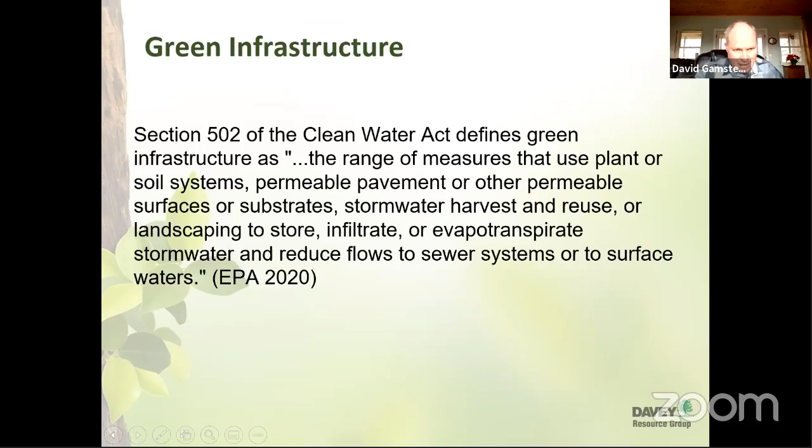That's a lot to say. That is a big mouthful. But now I'm going to double down on it. This is kind of the nuts and bolts of it, and why we think this is a very viable solution for many of our communities.

It's a cost-effective, resilient approach to managing wet weather impacts that provides many community benefits. While single-purpose gray stormwater infrastructure is designed to move urban stormwater away from the built environment, green infrastructure reduces and treats stormwater at its source while delivering environmental, social, and economic benefits.

So what we're talking about is restoring the natural systems that take place around us, where we don't have very highly complex, paved, developed communities.

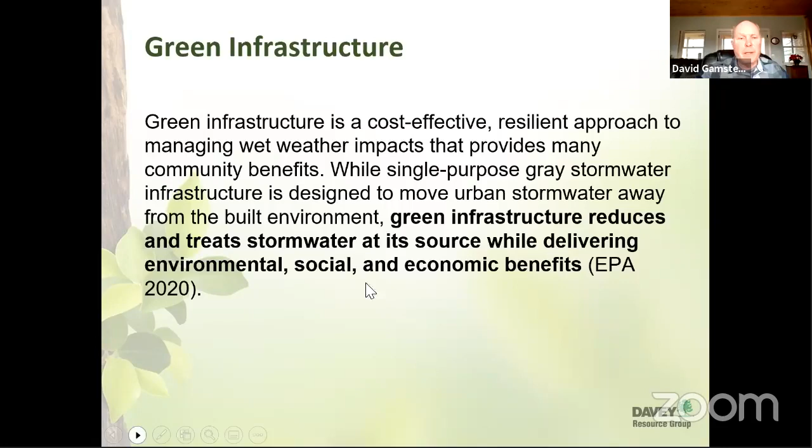And so what I thought was interesting from the two cities that I've worked on - well, actually we also did some work with Addis Ababa, Ethiopia, which is a totally different animal, different issues, different problems - but Malmo and Cincinnati were both kind of similar in how they're addressing some of these concerns and problems with stormwater.

And both communities are using their parks and open spaces for managing stormwater and integrating it for exponential benefits. So parks can serve their primary goals to offer both passive and active recreation, while also containing spaces that mitigate stormwater. Green infrastructure can achieve essential utility functions in the community while creating environments that provide nearby nature experiences and support human health.

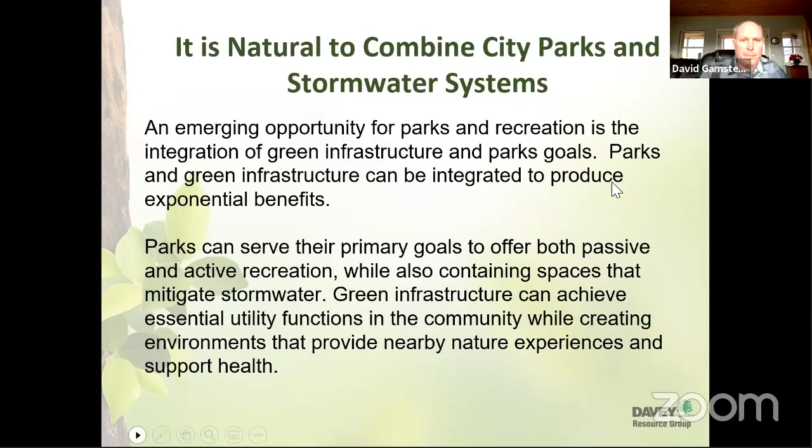Parks and clean water are both important public commodities, and combining the two offers great opportunities for collaboration. In the simplest form, water management requires space, and parkland is a leading resource of space in cities. Conversely, park maintenance requires money, which most communities have to balance budgets with police and fire departments, and parks are always scrapping for every dollar they can get.

And water utilities, such as sewer or stormwater departments, usually have a steady, predictable source of revenue. So we need to think about how we're going to integrate these systems in our parks through careful planning and community engagement. But there are great rewards if it's done properly, and today I'm going to show you some projects that I think are very rewarding.

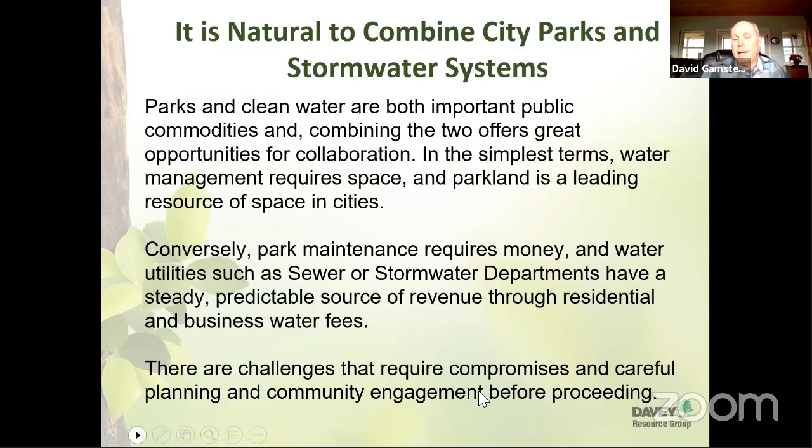So I wanted to look at, really, do we really have the opportunity in our high density, highly developed communities and cities, do we really have room to do this kind of work? So I looked at the Trust for Public Land statistics. This is from '19, I don't think it's changed much as of now.

But look at New York City. We think of New York City as a very, very highly developed community, but they have almost 22% of their area as parkland, 40,000 total park acres - big numbers. DC, we're looking at 21.1%. There's probably not as many opportunities in DC for green infrastructure integration, but San Francisco, we're looking at almost 20%. Jersey City, Boston, Minneapolis - these are all cities that are considered to be pretty well developed, but they all have a substantial percentage of land area devoted to parkland.

So the first one I want to start with is Malmo. Malmo is a coastal city, just above sea level, and there's a lot of concern about climate change and rising sea levels in Malmo. They also get quite a bit of rainfall, and it's very flat, so they have problems with stormwater and getting it out of some parts of the city. They see it as a value to reuse it as much as possible and to integrate it. They don't have combined sewer systems like we have in Cincinnati, but they still have flooding issues.

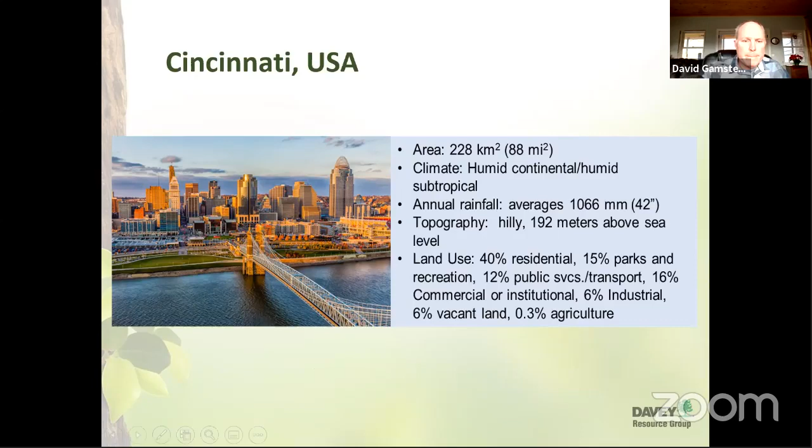And then Cincinnati, my hometown, both cities are similar size. Cincinnati has more rainfall, 42 inches. The topography is very hilly. It's very different, but the land use is kind of the same. And the primary issue in Cincinnati is combined sewer overflows.

So they wanted to look at how they could manage that water upstream, and the first place they looked was this park. Part of the solution was to excavate some of the soil out of this. Even though it is a slope, we still have drainage out, but they could detain parts of it by creating these small basins in lawn areas. They're still used as lawn areas, still used for passive recreation - when I was there, people were throwing Frisbees and hanging out in these areas. It gets wet sometimes in the bottom of the basins, but it's still used for passive recreation. They did their best to locate these away from existing groves of trees.

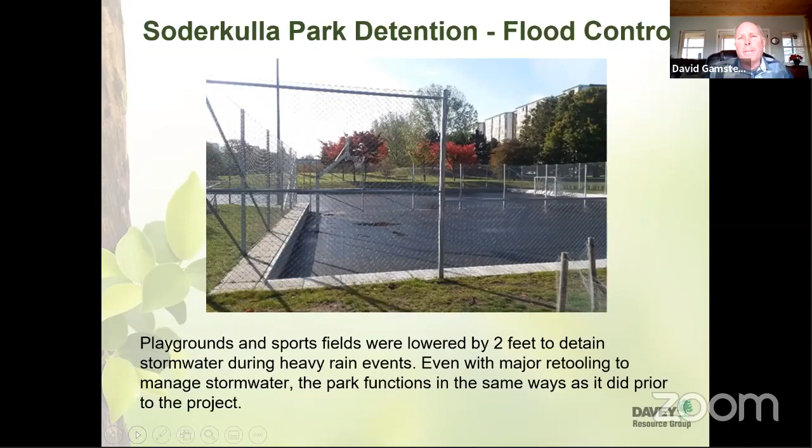I think Germany is number one in green roofs, and I think Sweden is number two, to develop green roofs because of the environmental benefits that they get. The roofs are transpiring water, they're filtering it through the media and the plants, they're slowing down peak flow. There's a lot of benefits to it, as well as preserving the length of time that the roof is functional - you get more years out of it if you put on a green roof, plus energy conservation.

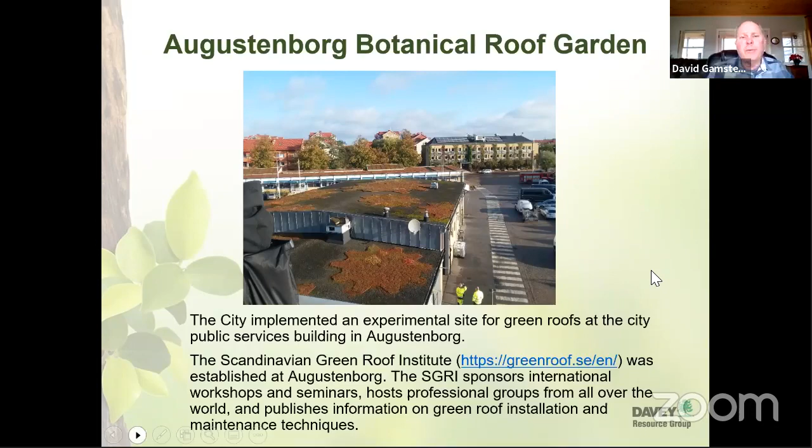So they partnered with the Scandinavian Green Roof Institute. They gave them some space in their building and set up a big demonstration experimental garden. The scope of this is just huge - we got to go up there and walk around and look at it. They bring people here from throughout Europe and the United States to do training, and universities sponsor different experiments. They do different types of planting - they're looking at different plant ecotypes and how well they manage stormwater and how well they grow on green roofs. Here we have a couple different types that we use.

We have intensive and extensive systems, but they're kind of based on where we live, we use certain plants. In Malmo, they're looking at what else can be done. How can we do something that's going to be usable in the northern parts of Scandinavia as well as the southern part? Malmo is the southernmost part of Sweden. How can this technology be transferred and used, and how can we experiment and figure out what works best?

So they do water testing for the water that comes off of the roof. It was a really interesting use of public space that isn't impaired by the installation of the stormwater management controls. They have partners to help manage it, and it was just a really cool place to go visit.

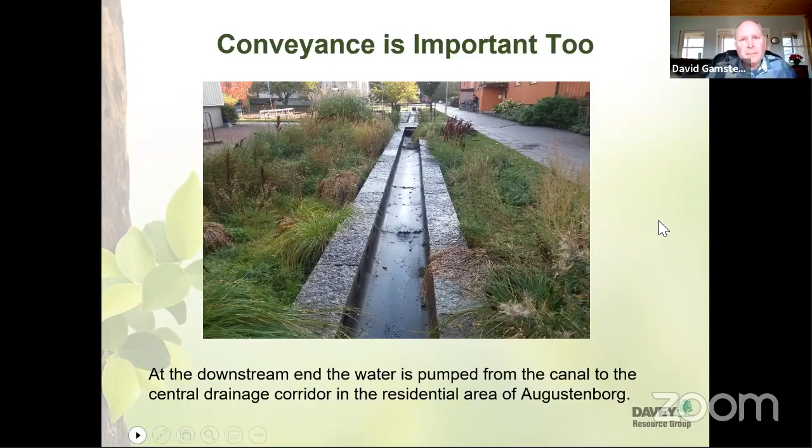Then in Cincinnati, I worked in the park department. I was the natural resource manager for the city, and for 5 years of my career I actually worked with our sewer department doing the stream restoration project. It's also a combined sewer overflow project, as well as conducting green infrastructure projects.

So we actually constructed them. We met with the community, got feedback, and decided what was acceptable and what needed to be modified. We worked with the designer, the design team, the engineers, and came up with a series of projects that we constructed using contracts that we bid out.

This was one of the first ones I worked on. Ault Park is one of our regional parks, in a very affluent community. You can see the stream channel is completely degraded. This is a combined sewer that's highly eroded. All these plants are invasive - there's Amur honeysuckle, lesser celandine, pretty much nothing of value. There's no habitat, obviously no amphibians or inhabitants of the stream here. It was just a dead system.

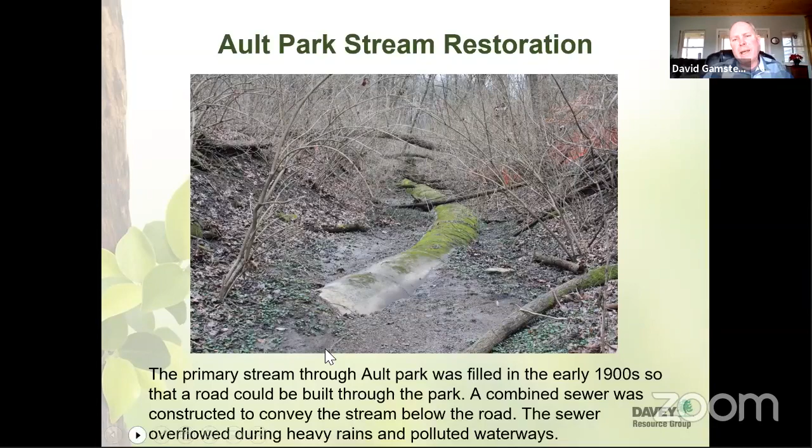So the concept was - let me go back. In about 1900, this was a stream channel that flowed through the park. Instead of building a bridge up here, they filled this valley and put in a sewer system below here. They filled in this valley with fill and built the park entrance road on this. It's actually a neighborhood road with 2 lanes that connects the park to the neighborhood and then to the neighborhood on the other side. So the idea for this project was to do some testing on the sewer system, to reline parts of it that had failed, and to put in this culvert right here.

This is an existing wetland that was there. We worked around it, and then closed off all the stormwater. All this water was getting into the combined sewer system before.

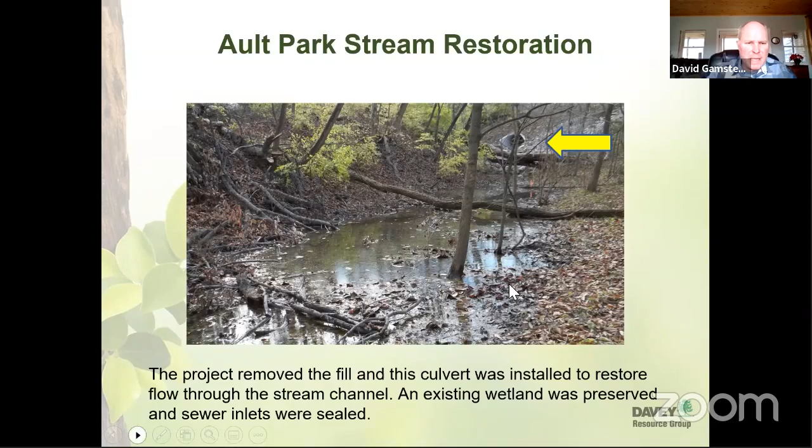It would drop in an inlet on the other side of this road fill and drop into the combined sewer, where it would flood downstream and overflow the sewer system. So then the stream channel was reconstructed.

This is part of the area where we directed them. We looked at what vegetation was there, what was quality and what was not, and created places where they could get from the haul road to the stream to do the restoration project without disturbing mature trees. We also tried to direct them into areas heavy with invasive plants, since we didn't want them there. When they were finished, they went back and touched up with herbicide treatments to get the invasives out, then restored it with different plantings.

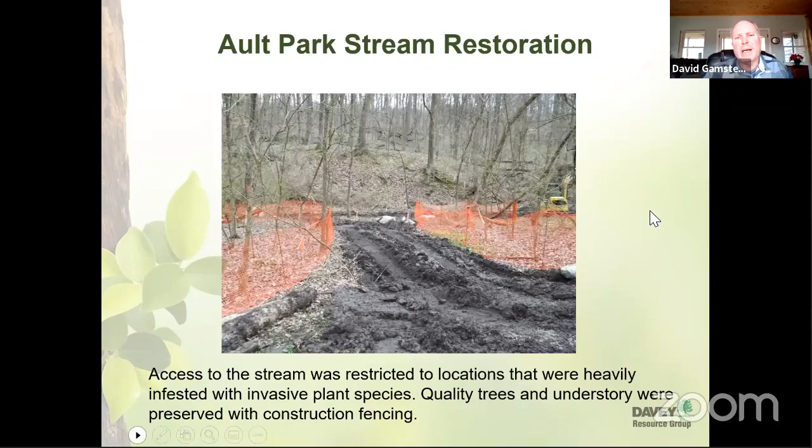We also looked at all the trees impacted by the project. There was a community request to preserve as many trees as possible, and that was my goal anyway as natural resource manager. So we identified all the trees by species and size and had them put on the plans and labeled, so that as the process went through we knew exactly what would be coming out and what we needed to work around to protect through fencing or construction methods.

And this is what it looked like when finished. That's the same section of stream I showed you before with the combined sewer, where you can see the top of it. We used live stakes and native plants and trees to restore it, erosion control blankets, and seeded it with a native seed mix. It was a really good project, a fun project to work on. These are the kinds of projects my company does now that we can help out with.

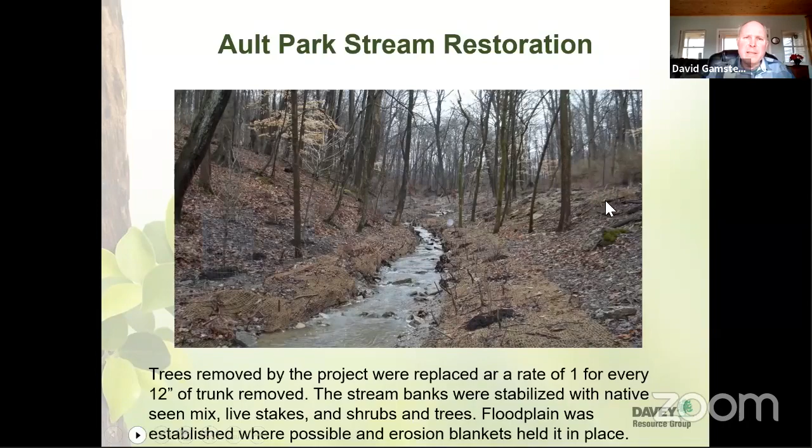This is Glenway Woods. This stream was similar - there's a combined sewer underneath it, and this one had to be relined. Then they engineered the stream to make it bigger and wider. Before, this was just pretty much a channel, like the one I showed you before in Ault Park before it was restored. So this one they engineered to handle more stormwater because they did separation on the street grid above.

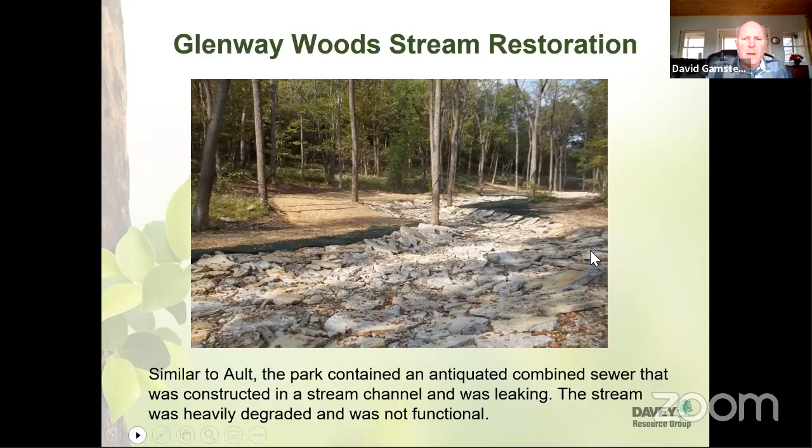So where we had stormwater inlets along the roadways above the park - this park is essentially a valley - the water is piped down the slope and into this, opening up and daylighting through this reconstructed stream channel. They designed it so during low flow, water would flow through the gravel storage layer below this aggregate, below the limestone. They were also able to install a haul road using decomposed granite for the surface, so it is pervious.

This park was largely inaccessible before this project. Afterward, we had a walking path through the park, a restored stream channel, replanted with native trees and plants, and then it culminates in a wetland.

This is retention - a basin that was there before, constructed a long time ago, but was no longer functional. It had some pretty mature elm trees that we tried our best to work around and keep in the system, so it would be a shaded wooded wetland. Wooded wetland habitat is the number one priority for our state urban forest management plan for preservation and restoration.

We're able to use this project to leverage grant money. We got, I believe, $250,000 for this project through a U.S. Forest Service grant for the water quality improvement of the Ohio River Basin - that was the title of the grant. This kind of folded right into it.

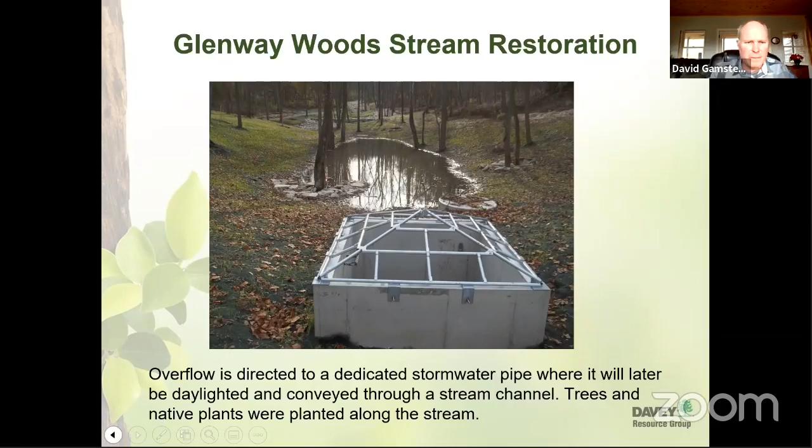From here, when we get heavy rains, it goes into the overflow and flows into a dedicated channel that takes it out to a larger daylighting project happening downstream - a mile-long stream daylighting project through the heart of a different community. I just want to state again that it's pretty incredible. All the stone was hauled in. This was a big project, a long way to go. It was not cheap - I don't know the total construction cost, but the end result is just amazing.

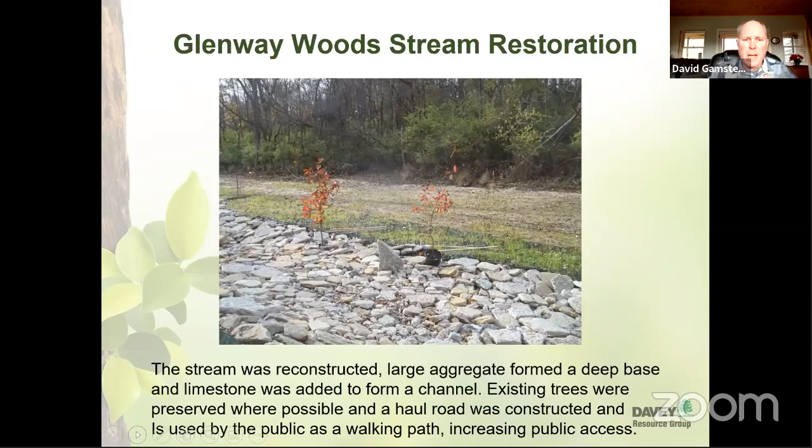Then this existing basin was planted with wetland plants, some in the stream, some on the edges. We preserved the big trees that we could, and also planted new ones to take the place of ones that wouldn't make it.

So to summarize, parks and public spaces can be used for managing stormwater and provide additional public amenities. And that's the key to green infrastructure. It's those additional amenities that you get out of it. It's not just getting water to a stream or through a pipe. It's about making it part of the space and the experience.

These projects demonstrated how we could use green roofs to lengthen the lifespan of a roof on a public building while reducing energy. That was very important. And then the research opportunities and education, bringing groups in and training them on green roof installation, has been amazing. They also leverage money from that.

Removing invasive species should be a part of all of these projects. It can also improve park access and recreational opportunities. The example of the haul road going into Glenway Woods Park is a great example. That park was largely inaccessible, but now people are using it much more often. And providing educational opportunities through signage, through nature interpretation, increasing tree canopy, and reducing urban heat island effect through evapotranspiration and shading.

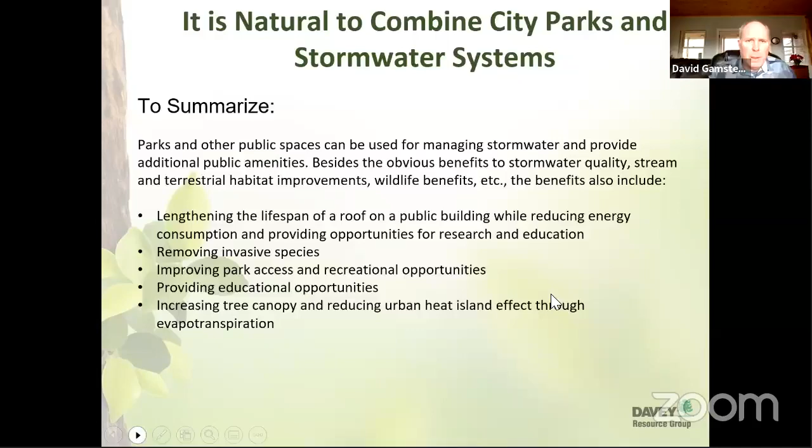The one thing I wanted to add in here, Kathleen Wolf is a researcher at the University of Washington, and she did a quite extensive study on green infrastructure, stormwater systems, and the impact on human health. It was very interesting. If you look at it economically, we're saying all these things are expensive, and we know that parks are kind of at the lower rungs of the funding revenue source, but human health services cost nearly 17% of the annual U.S. gross domestic product.

Those are very, very, very big numbers. And when we start to think about and leverage these systems as making people healthier and more resilient, then we can't afford not to do it.

So that's what I have for you today. Any questions?